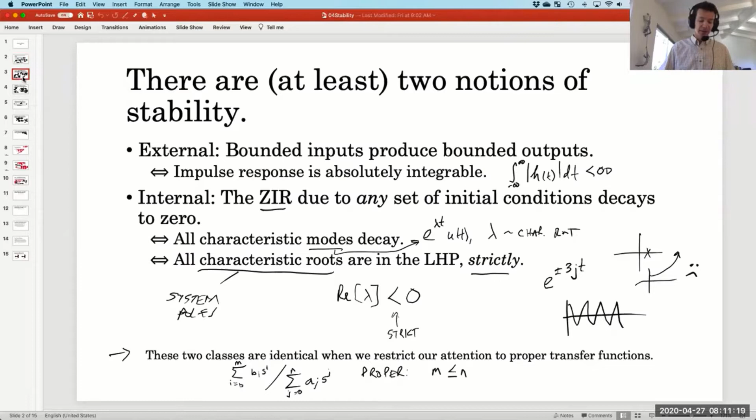We also have to be careful about which poles we are talking about, right? So are we talking about the poles of a subsystem, or are we talking about the poles of the overall input to output, what I'm going to call the closed loop system? And those are mostly what we're going to be focusing on.

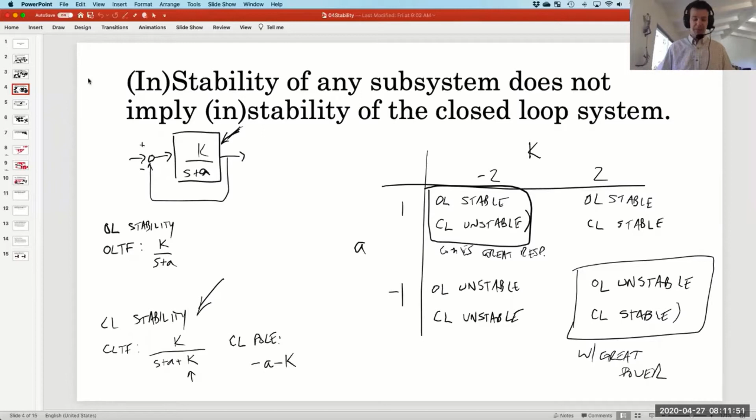So this slide that we have on screen was our quick little demo to show that stability or instability of any of the blocks really doesn't tell you a whole lot about stability or instability of the system as a whole, viewed as an input-output relationship. So the tool that we are going to use to analyze system stability is called the Routh-Hurwitz criterion.

And the idea behind this is way, way back in the day. This result actually dates from like the 1880s, where machines were getting more complicated. So you think like steam engines. And yet people wanted to control them with more accuracy. And the first step in controlling a steam engine would be making sure it doesn't blow up. Okay, so there's some historical motivation for this.

So if you have a mathematical description of your engine, you would like to design a controller that makes sure it doesn't blow up. So the idea here is that the power output from the engine would then somehow control the valve that let the steam into the engine. So you get a self-regulating system. So that's the context in which this stuff was developed.

And it has this very arcane feeling, right? It's this table of values, and you're supposed to do all these determinants. It feels old-fashioned, and that's because it is old-fashioned. But that's not to say it's not useful, and I hope to convince you of some of the use cases today. So that was a huge historical tangent. Let's get back to talk about what the Routh-Hurwitz criterion is.

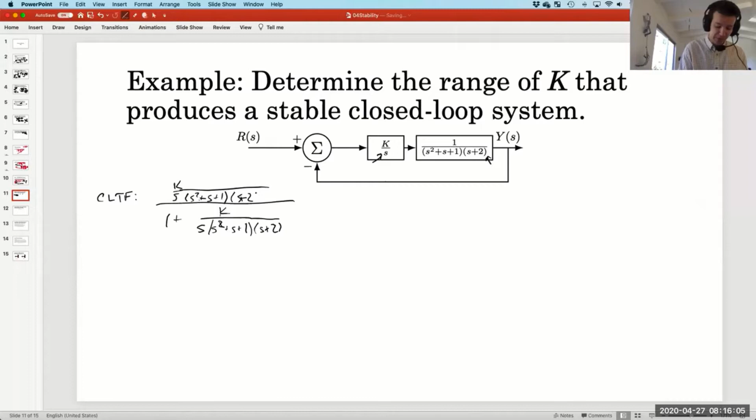So this is not in a form that we can extract the characteristic polynomial from. So let's multiply through top and bottom by this denominator in the denominator. So this ends up being k on top, s squared plus s plus 1, and then s plus 2, and then plus k over here. So that's actually the kicker.

And this is, I hope you can see, the closed loop characteristic polynomial, which again is this denominator. So we're gonna need it. So let's just write it out. Closed loop characteristic polynomial. If you FOIL all this out, you get s to the 4 plus 3s to the 3 plus 3s squared plus 2s plus k.

So my point is that this is a regular old polynomial, except this is a variable. And if you try to plug this into your root finding algorithm, you're not going to get very far, because the very first step in entering your root finding algorithm is to tell your algorithm what the polynomial is. And we don't actually know what it is yet. That's the point of the question.

Okay, so I think when I teach this, people think, well, I spent $500 on my calculator that can do all this stuff. And my point is that no, you have a very nice calculator. That's good for you. But I don't think it can do this, not unless you iterate, not unless you write a for loop that explicitly tells it to do this.

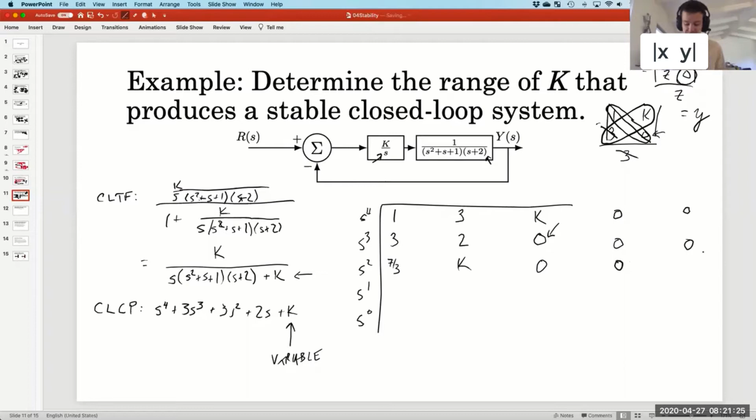Did I lose anyone? Anyone have any questions on that? So when you did the little calculation on top, isn't that y negative? So wouldn't you have like a sign change? So let's be clear here. Okay, so let's just do what's inside the bars. So we'll get the negative out here and we'll get the z down there. Mm-hmm. So inside the bars, we get x times 0 minus z times y. Oh, okay. Yeah, it's hard for me to see as well, but this and that will cancel.

Gotcha. Thank you. How did you get 7/3 again for s squared? Sure, so I guess I should stop taking shortcuts if I tell you we're gonna go slow. So this is b sub 3. And that means it's the negative determinant of 1, 3, 3, 2 normalized by 3. So this is 9 minus 2 over 3. Okay, got it. Thank you. Yeah, you're welcome. Okay, are we ready for the C row? Because here's where it gets complicated.

Okay, so C, we'll call that C3. And again, it's the determinant of the 4 entries directly above it. So that is 7/3 times 2 minus 3 times k divided by 7/3. Okay, so this is what I'm calling the reverse determinant, which is bottom left times upper right minus upper left times bottom right, and then always normalized by the leftmost entry in the row above.

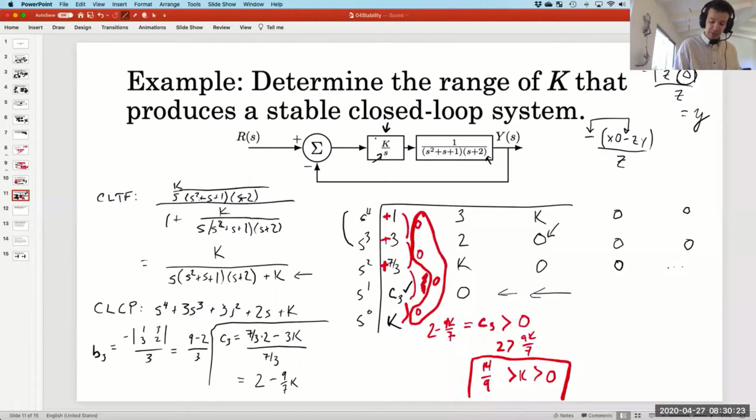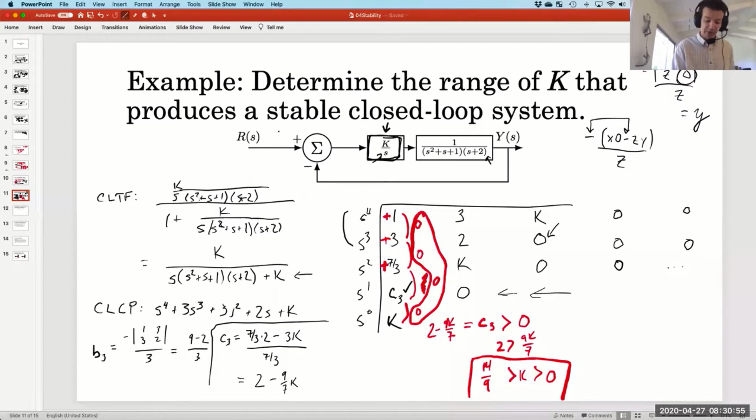One more thing I can point out is that this block is called an integral controller. It integrates the error and it sends that signal to the process or the actuator. And as you might imagine, this integral controller is marginally stable on its own for all k, yeah? But if we allow k to be in this fairly tight range between about 1.5 and 0, then the closed loop system, if you black box this, is stable, regardless of the marginal stability of your controller. Let's try one more example, this time with 2 variables.

So same prompt, what kind of gains Kp and Ki make this system closed loop stable? Do you want to take a crack at this? Let's see, check the time. Sure. Yeah, take 5-ish minutes. See how far you get. I'll catch up with you in a bit. Feel free to ask questions in the chat or over audio. I'm just going to hang out.

Could I verify the closed loop transfer function before I do too much more? Go for it. Lay it on me. Okay, so on the numerator, I have s times Kp plus Ki. Mhm. And then in the denominator, I have s times (s plus 1) times (s plus 2) plus s times Kp plus Ki. Yeah, that's right. Thanks.

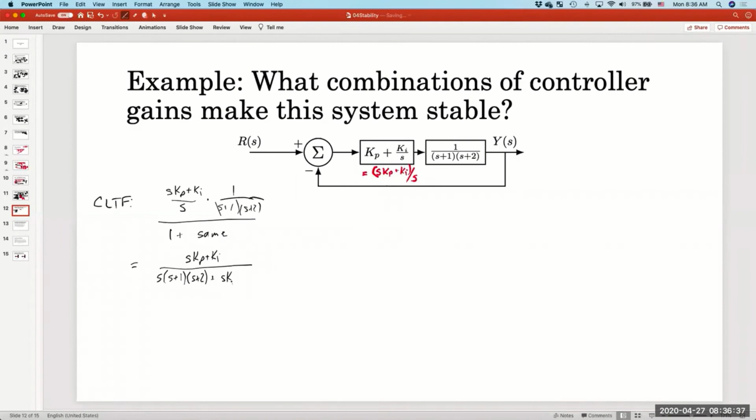Okay, if you don't mind, I think I'm going to take over and catch up, but please feel free to keep working until I catch up with where you're at. So yeah, as the disembodied voice confirmed, we have a closed loop transfer function that looks like s times Kp plus Ki divided by the product of all the denominators plus s Kp plus Ki.

And if you had trouble getting to this point, I think a nice trick would be this: the controller was presented to you as the sum of a proportional term and an integral term. But because we're going to be working with polynomials, the very first thing you want to do is actually to make this a single fraction. So that's what I've done here in red, and that allows me to take it a little bit easier through the rest of the problem if you combine these over a single fraction over s.

So we're not after the closed loop transfer function, we're actually only after the closed loop characteristic polynomial, which you get when you FOIL out everything down here. And according to my notes, this looks like s cubed plus 3s squared plus (2 plus Kp) times s plus Ki. Okay, so again, this is a polynomial whose root locations, either left or right half plane, dictate the stability, either stable or unstable, of the closed loop system from R to Y.

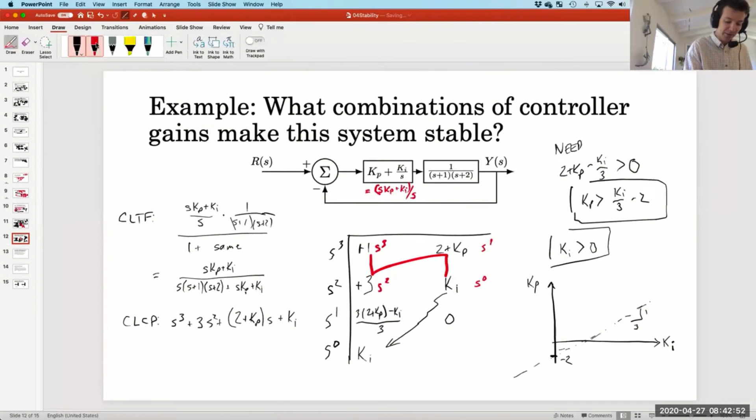And how would we visualize this? We need ki to be positive, which means we're looking to the right of this vertical axis. And if we need kp to be bigger than a line, then I would pick that line something like, that's supposed to be a line for those of you who are mocking my drawing skills. And so this would be the intercept when ki is 0, this would be the point -2 on the kp axis. And this has a slope of rise of 1 and a run of 3. So you tell me, where in the plane is the acceptable design region? Above this line or below it? Above? Yeah, because we want kp bigger. So I'm going to shade the acceptable design region. Yeah, so this is our happy place.

I had a question about the Ks. Sure. The more Ks we have in our closed loop characteristic polynomial, does that decrease the amount of area where K can exist? Well, not exactly, because what would happen if we had a third gain, a third degree of freedom is the technical term? Then you would actually change this plane into a space. Oh, okay. So the idea of reducing area when you have a three-dimensional space doesn't make a whole lot of sense. Usually, the more degrees of freedom you have, the more combinations you can have that create an acceptable controller design. I mean, it makes the algebra harder because you get more things depending on each other. But in general, more degrees of freedom make the controller more designable, which makes your life easier.

Gotcha. My thinking was that since we increased the Ks, because in the earlier problem we only had a small range, I thought we had only a small range of numbers we could plug into our system. Okay. Yeah.

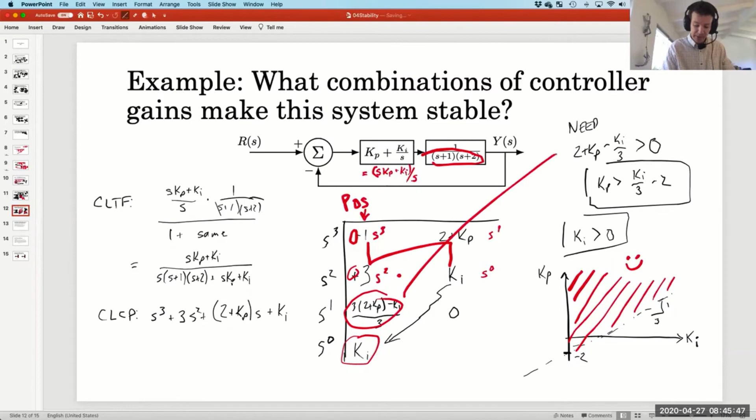Oh, I got it. So this positive and that positive were kind of handed to us, which means we need to make this positive and that positive, which is where I got those expressions from. Got it, thank you. That makes so much sense. Yeah, absolutely.

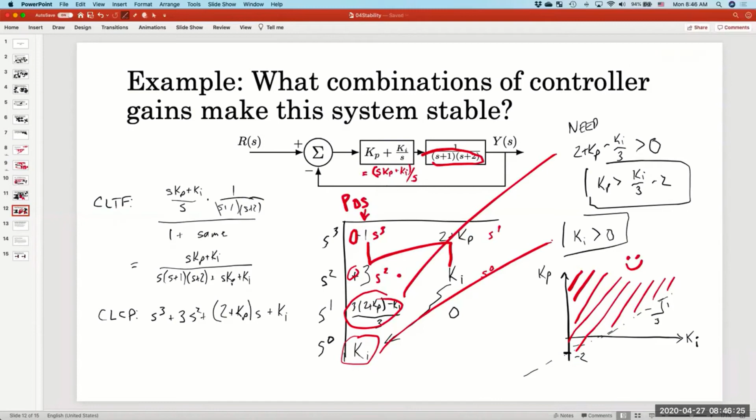Instructor, I'm not certain if you already mentioned this before, but because we're looking for positive numbers here for our array, if we were to get a negative number, how would we convert that to being stable? So if that negative number in the left-hand column doesn't have any k's in it, that means that you cannot stabilize the system with the controller architecture that you're analyzing. Gotcha. So if this 3 had been a -3, we'd be hosed.

Oh, okay. I mean, then the answer would be never. There are no combinations of kp and ki that make this closed loop system stable. Exactly, with this given controller. Right. So then in reality it would be, okay, a PI controller isn't sufficient. Then you would have to go back and try a different controller architecture. Gotcha, thank you.

I had a question as well, if it's okay. Yeah, go ahead. So you said something interesting earlier that implied that higher order systems tend to be harder to design. So it would be preferable to have a lower order system? Well, if your objective function is how easy your job is, then yes. If your objective function is to build a better system, that's going to be harder. In very broad strokes, that is a harder thing, but it is a more desirable thing for the people who are paying you to do your job.

So yeah, it would be nice if all we ever needed was first order RC filters. That's great, there's only one parameter to find. You just find the time constant, and then you give it to the tech and say, okay, pick an R, pick a C, make sure they multiply to be this number, and then I'll be out getting lunch. But you're not going to get paid very much for that.

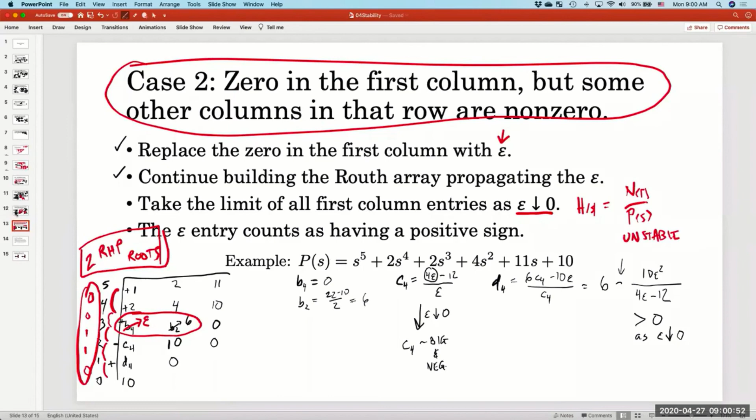I was going to ask you too, what would Kp plus Ki over s be? Would that be some sort of controller? Yeah, so if you look at it, the name is pretty much exactly what it does. So what does this controller do? It says, give me the error, and I will scale it proportionally to Kp, and then give me the integral of the error, and I will scale it proportional to the integral of that error. So this is what I would call a PI controller.

Sorry, not just me. This is called a PI controller because you act on both the error proportionally as well as the integral of the error.